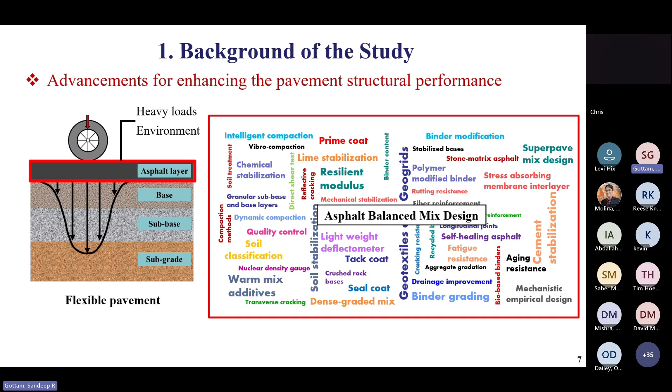More specifically, if we see the advancement, which is the asphalt balanced mix design process, this is a kind of buzzword around the globe for the past 5 to 10 years. So what this asphalt balanced mix design is, it's basically the process which aims at mimicking the rutting and cracking performance of asphalt mixes. The asphalt layer basically fails primarily in two failure conditions. Those are rutting and cracking failure. So making these mixtures resistant to rutting and cracking is called the balanced mix design process.

How do we do that in our laboratory? So basically to make a mixture resistant to rutting and cracking, we need the basic materials, as we know, the binder and aggregates. Once we have these materials, then we prepare the asphalt samples, which consists of a mixing process and compaction using a Superpave gyratory compactor. Then based on the local test specification and test procedures, we have to run rutting and cracking tests. There are numerous rutting and cracking tests that are available with the agencies.

But here in Texas, especially, we use the Hamburg wheel test and overlay test to evaluate the rutting and cracking resistance. So this mix design process is trial and error, and until the mix passes a specified rutting and cracking requirement, this process will be done in the laboratory. Once the mix meets the rutting and cracking requirement, the next step is to produce the JMF, and then next the construction of asphalt layers will go in the field.

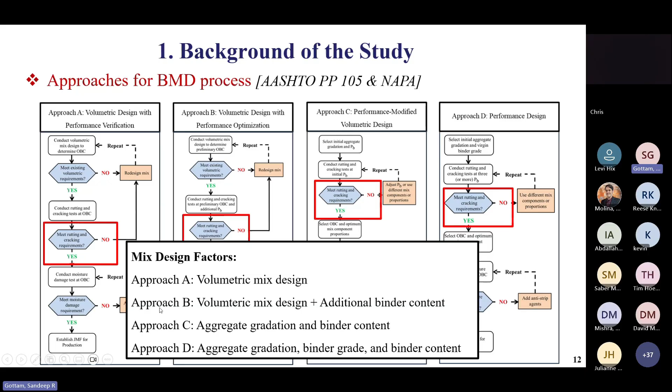Since we have a flow chart here, and I'm unable to go through all these details, instead of that, I would like to just highlight the mix design factors that control each approach. If we take approach A, that is completely dependent on the volumetric mix design, and if one would like to go with approach B, then the factors that need to be varied are the volumetric mix design plus additional binder content. In the case of approach C, it is related to aggregate gradation and binder content, and approach D considers aggregate gradation, binder grade, and binder content. So approach C and approach D completely eliminate the volumetric requirement. They are special approaches, whereas they don't consider the volumetric mix design process.

Okay, so let's start and present a little bit about skid resistance. If we look at the pavement hierarchy level, we have roughness at the top, megatexture next, macrotexture third, and microtexture fourth. So this is a kind of hierarchy level of the pavement, how it starts from roughness at high scale to microtexture at very low scale level.

The first two, roughness and megatexture, are related to comfort, and comfort is directly dependent on the distresses that are there on the pavement. So if a pavement shows rutting, cracking, or any other kind of failure, that will affect the comfort of the road user. So the comfort won't contribute to the skid resistance. The only two factors that contribute to the skid resistance are macrotexture and microtexture.

The thing that affects the macro texture is gradation of the mixture, whereas micro texture is more specifically focused on the individual aggregate texture. So how macro texture and micro texture generate the skid resistance is based on the hysteresis forces.

If you see here in the figure, the macro texture causes an opposing force on the tire. That force on the tire generates skid resistance, and the micro texture generates adhesion forces. This is due to the tire and the individual aggregate particle interaction. So both these hysteresis forces and adhesion forces generate the skid resistance at the interface of tire and pavement surface.

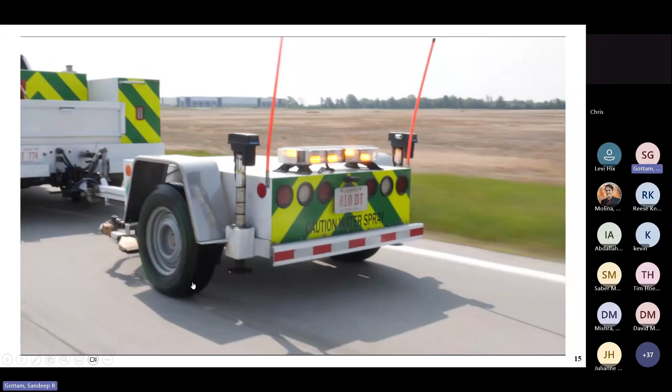It's all safe. I think this is kind of a skid test that we do in the field to evaluate the pavement skid resistance. So the question might be, how do we evaluate in the lab? To evaluate mixture frictional resistance in the lab, we have a procedure that we follow. Before explaining this slide, when it comes to the field, I will say skid resistance as a name, and when it comes to the lab, I'll say mixture frictional resistance. So skid and friction are the two names used technically in this field of pavement engineering.

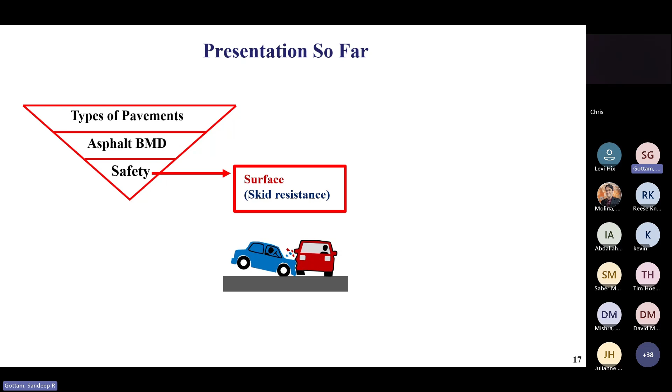Then, more specifically on the flexible pavement side, I talked about the asphalt BMD process and its importance for structural performance. Then, on the safety aspects of flexible pavement, I talked about the surface factor that affects road user safety, which is based on skid resistance. Okay, so let me move on to the significance of the study.

As we have shown in the title of this workshop, we are trying to incorporate skid resistance into the circle, more specifically during the asphalt mix design stage. So far, any agency or any contractor does a mix design process. At that point, they target rutting, cracking, and moisture damage performance. If the mix meets the rutting, cracking, and moisture damage requirements, then it goes to field construction.

But one thing that was not given much emphasis during this mix design process is skid resistance, which is especially important for the safety of road users. So we are trying to add skid resistance as a part of this full circle. When we consider this end goal, we found a few gaps in the literature, which are the factors stopping us from incorporating skid resistance into this circle. The first factor is that if we have a poor frictional resistant mixture, we don't know how to improve the mixture frictional performance.

The other thing is, as I presented, the test method that we use in our laboratory takes almost 50 hours. So agencies or contractors may not be able to use those kinds of test procedures, so we need a surrogate test method instead of the lengthy procedure that we have as per the AASHTO PP 104 specification.

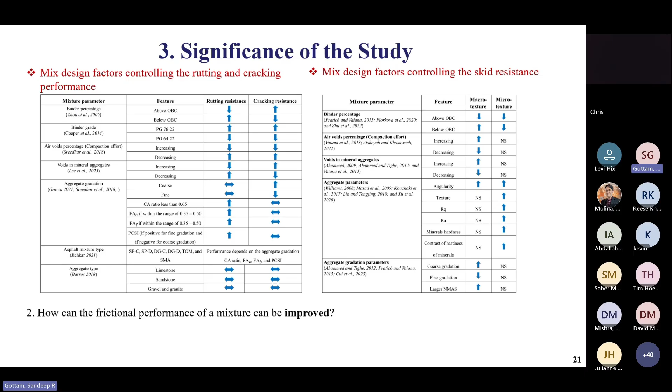But on the other side, to improve the mixture skid resistance, more specifically to improve the macrotexture and microtexture, there are factors that we found through the literature study, but most of the factors were not studied, as I highlighted here in the cells as NS. So there is a gap in the literature to understand how to improve the mixture skid resistance using the mix design factors.

Then at third, as I mentioned, this process that we follow in our laboratory takes 50 hours. So this is not a practical or feasible method for highway agencies or contractors. Not only the time, the other factors are the manpower and the initial cost and operational cost of these devices to evaluate the mixture frictional performance. So there is a need to come up with a practical or surrogate test method instead of the process that we currently use in our laboratory.

Then at fourth, as I mentioned earlier, we have frameworks to improve the mixture rutting and cracking performance, but we don't have a framework to improve the mixture skid resistance. So if we have a combined framework that considers rutting, cracking, moisture damage and skid resistance, and we use that kind of framework during the mixture design stage, it will definitely help to make the mixture resistant for all those four performances, and that mixture will definitely perform better in the field when it is constructed and open to the traffic. So to address all these four gaps, we came up with a research methodology.

Since our first gap is to improve the frictional performance, in our research methodology we tried to vary each mixture parameter and see what is controlling the mixture frictional performance. Once we did that study, we performed some case studies in our laboratory and field friction studies. The case studies and field friction studies are a validation and verification of the parameters that we identified in our stage 1.

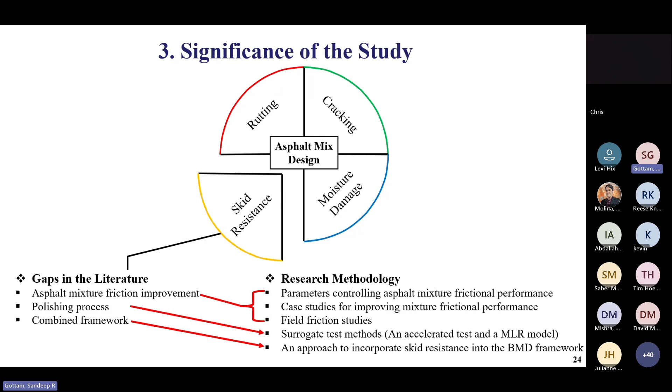Okay, let me start with the results part of the study. Before beginning with the results, I would like to give a glimpse about the materials and test methods that we followed. If I show the materials that we used, we used 3 grades of binders in our study, and we used 8 types of aggregates, which include limestone, gravel, dolomite, granite, rhyolite, sandstone, trap rock, and pyrite aggregates.

And we used 7 types of asphalt mixtures. Those are Superpave coarse, Superpave dense, dense graded coarse, dense graded dense, thin overlay mixtures coarse, thin overlay mixtures fine, and stone mastic asphalt. And then coming to the test methods, we have a video demonstration on how to evaluate the mixture laboratory frictional performance. This video demonstration is prepared by our PhD student Mirza Amiskan.

Now I'm going to stop here with my presentation and play that video. It's about a 14-minute video, and that video demonstration will give a visual experience on how to prepare an asphalt ring, how to polish, and how to do the friction test in the laboratory. So I'm going to play the video that we have as part of this video demonstration.

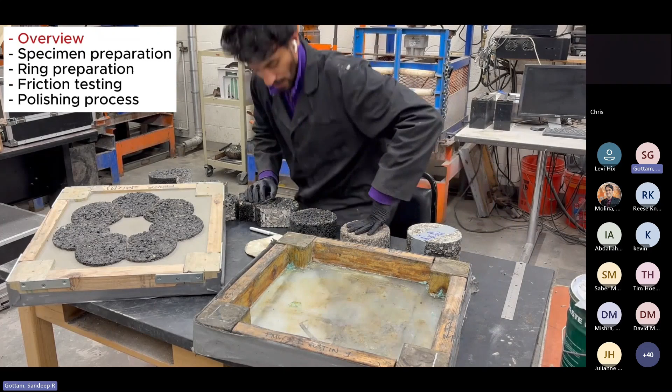So you can see that the sides are straight, right? And when we put them on the mold, it should be exactly like this, see, like touching each other. So that's the thing. This is an empty mold here, just to show how we do it. So I will place the samples here. Just have to put it, and we can see the height is the same. We can also use the scale just to make sure. But since I have been doing it for a long time, I'm just used to it.

We usually make 8 samples so that there is always an extra one if some of the samples is not good or it's crooked or something like that, just to be on the safe side. That's how we just place the samples in the mold. And you can see that the samples are good. We just rearrange it. We have to make sure that

all the samples are in the middle of the mold, because the DFT will be here, and if it's in the center, it will be good. The results won't be affected. Also, we put the mold under the 3-wheel polishing device, so the polish path is on the right one.

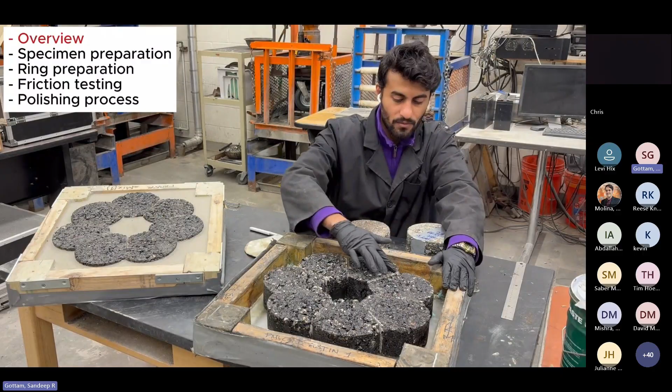So what I usually do is, after placing the samples like this, I usually run a finger like this, so that we can make sure that none of the samples is higher. There is no difference in the heights of the samples. So yeah, this is good, right?

And what about this field work? So once we have cut it, once the base is a flat surface, what we usually do is we sometimes put the sand in this mold, and then we put the samples on the sand, especially the samples that are lower than 62, and then we hit the samples a little bit with the rubber hammer, so that the sand is compacted. After that, we pour the cement on the mold. So that's how we do the samples that are lower than 62.

You have to make sure that the height of the samples is up to 62 millimeters, same as the mold itself. So that's how we do it. And then once you have done this, you just have to pour the cement in this mold, here in the middle and also on the sides, and make sure that the level of the cement is as high as possible. As we have already marked the sample, the next part is the cutting part.

So we have to make sure that there is no smaller aggregate or something on the cutting machine, because it will affect the cut. It has to be lying straight on the cutting machine. You have to be very careful about that. Even a little aggregate or a smaller aggregate can affect the cut. It will get crooked.

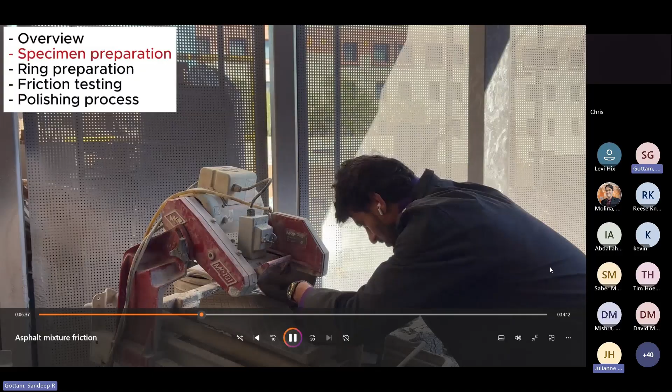So once you are done, we place the sample on the cutting machine. We put it as close as possible to the cutter, and by using a scale, we align the line and the cutter so that it's straight. So once we are done, it's straight. We make sure that it's not moving, and then we just start very slowly.

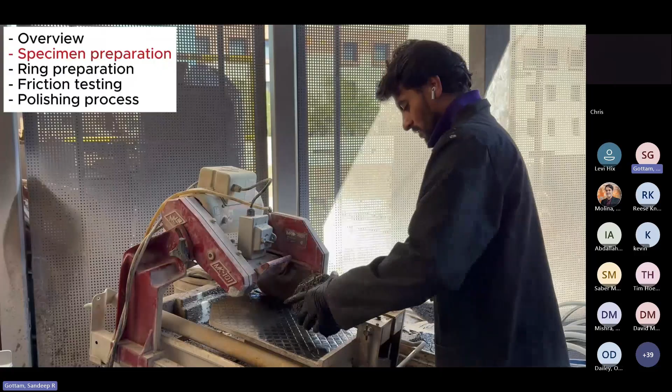And then we just turn it off, and then we remove the sample, and again we have to clean it because there are little particles in the cutting machine. We have to clean it very thoroughly, and then we can put it again like this, and then see, like now see, it's moving. So that's the reason there was something below the sample, and if you put it, it is moving, see, like this. So that's why it's very important to clean the cutting machine.

It should not move. Still. Now it's not moving, so now it's good. Again, we have to align it with the cutting machine. We don't have to press it against the blade, we just have to place it. Otherwise, it will affect the alignment. Now it's exactly at the line that we marked.

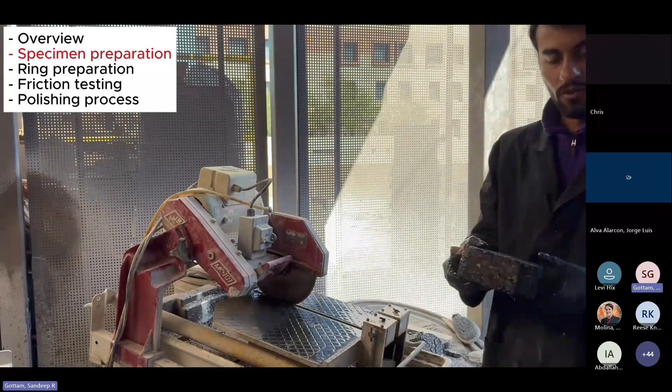That's how we can cut the sample. Now, as we can see, it's not crooked, it's straight, exactly straight, as we can see. Right. So now, once we have arranged all the samples, the next part is we have to pour the cement. That's how we do it. We pour it slowly.

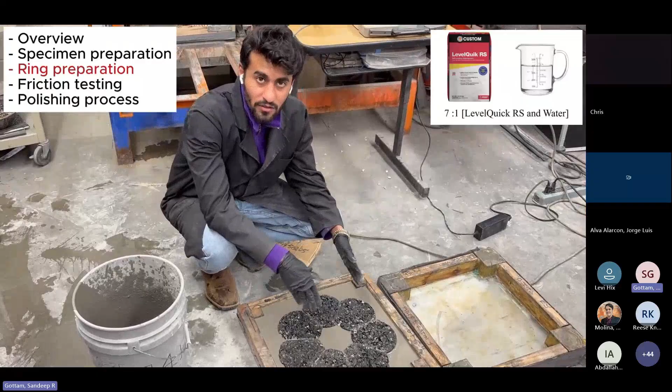Now it looks perfectly fine. The height is good, the cement level is good, everything is good, and now it's good to test. Like, we will leave it overnight, and when we come tomorrow, it will be dry and ready to be

tested. Alright, so here is the dynamic friction tester that we use to test the friction of the asphalt mixes. We also use it for the friction of aggregate rates that we make. So I will tell you about the steps of this. So this machine has 3 pads here. So when you run it, it goes up to a speed of 80 km/h, and then after that, this plate, it falls on the specimen.

So while it's going to that speed, the water, it starts throwing water from these holes on the sample, and then after that, like when it falls on the specimen, it measures the friction of that specimen. So we usually run up to 200 tests. After that, we change these pads because these pads, like, they have a life, so the friction results start to decrease. So that's why we have to change these pads after every 200 tests. So that's how we run it.

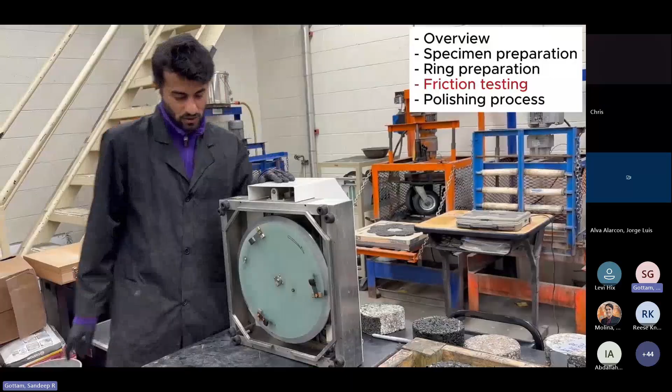We usually, when we are transporting the machine or moving the machine, we have to put it like this, and before the test, we just have to remove it and then run the test. So that's all about this machine, and now we will run the test and then we will see how it works. For the DFT, we have two outlets here. One is the USB and the other one is the power outlet. Usually we use a battery for this power outlet, and this lead connects to the laptop so that the data can be run. So the first step is that we move the DFT.

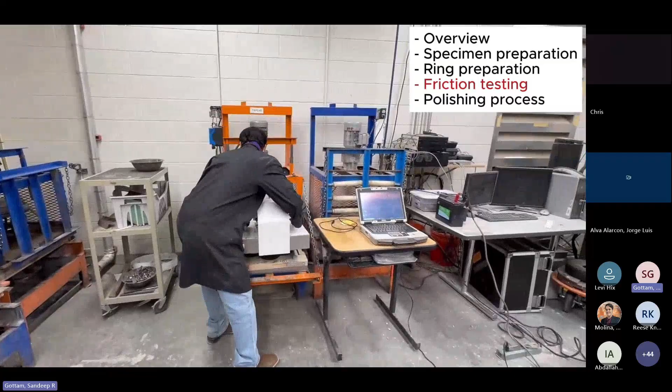Since it's the first time we are running this sample, we have to make sure that it's going to be done. Yeah, like that. Once we have placed the sample, what we do is we mark the location where we are placing the DFT so that the next time we run the test, it's not at a different location. So that's why we always mark the location where we are placing the DFT. Once we are done with that, as I discussed about the cables and this knob, we remove this knob and then we just connect the cables.

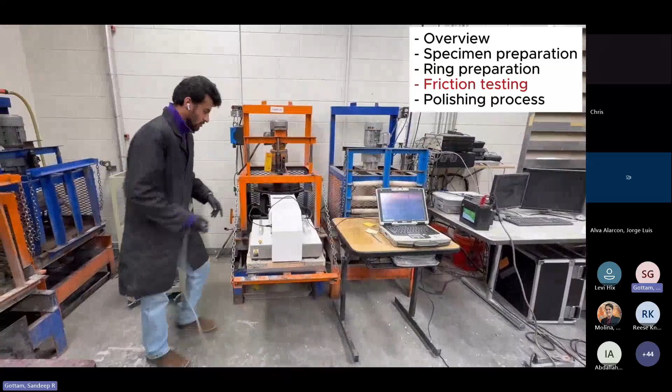The first cable for data is connected to the DFT and the power outlet. Then we have this one. So once we are done with the power outlet, the next step is that we have to connect the hose to the DFT. It's connected with the tank, so it supplies the water to the DFT, and it has to pour the water on the sample. When it runs, it will start pouring the water. That's how it gets the water supply.

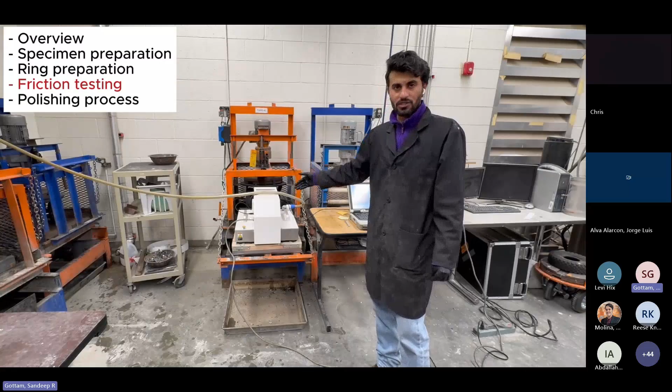Now the DFT is running, and it will reach up to 80 kilometers, and then a plate that's rotating below it will fall on the sample, and that's how it will measure the friction of the sample. And the water usually starts coming out of the DFT when it reaches the speed of 60 km per hour. That's how the test started, and as you can see, when the plate falls on the sample, it is rotating and it stops due to the friction of the sample.

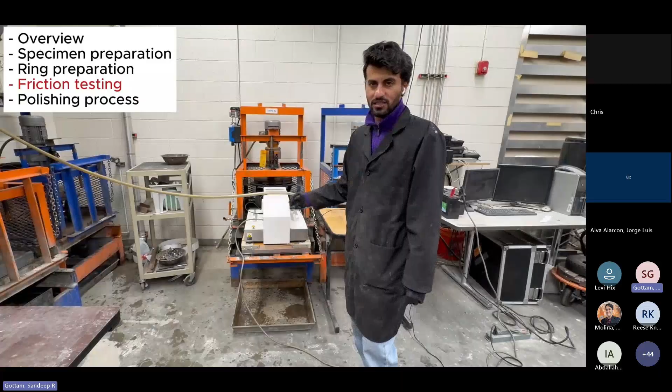So as I mentioned, we usually run 3 tests. So this was the first test. We usually wait just 30 seconds or up to 1 minute before we test another track. So now we will run another track, the second track.

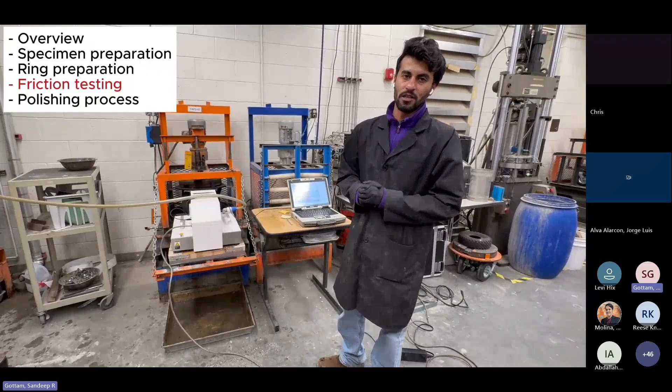And go up to the speed of 80 kilometers and then, after that we will just plot the values and take the average of the three tests at a speed of 60 km per hour. So once the test is done, what we do is just put the top back before we move it.

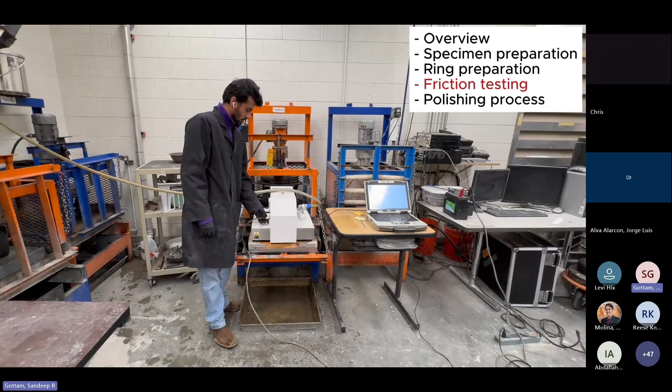Then when the machine is off, we remove the outlets, both the USB and the power outlet. Then remove the tools.

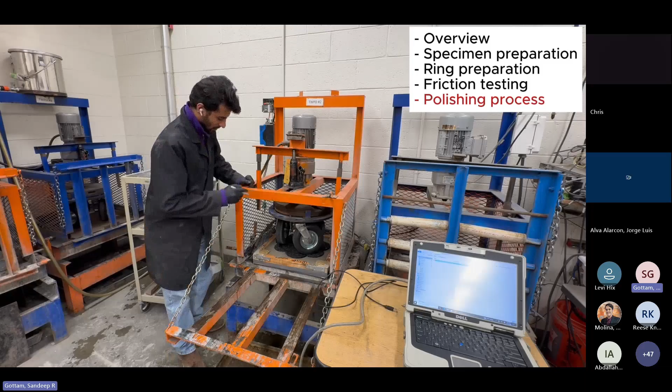Once the specimen is in, we can just start running the wheel polishing device. So I have set the cycles up to 1000 cycles. And what I usually do is I also mark it a little bit here, so that when I put the sample out of the wheel polishing device and test it for DFT, and I have to put it back, it should be exactly at the same position so that there is no variation in any of the results. So now you just have to run it, and that's how it starts polishing.

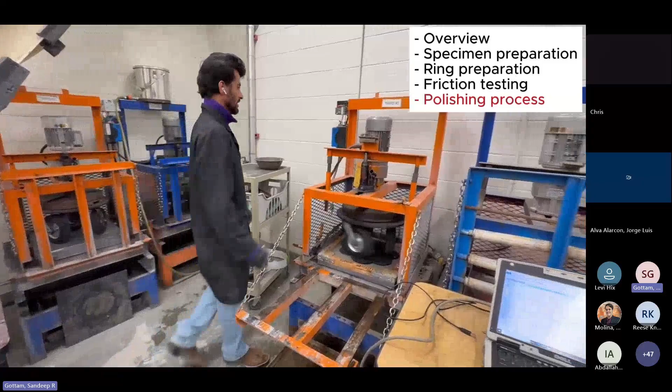As you can see, it will take up to 15 to 20 minutes for just 1000 cycles. So when you have more cycles, like 25K cycles or 50K cycles, you just run it overnight, and then you just run it the next time. All right. So as we have demonstrated in the video, this is how we prepare the asphalt ring and do the friction test and polishing process.

So I would like to show an Excel file which explains how we generate the friction deterioration curve. Okay, so as Amish mentioned in the video, we do 3 friction tests. If you see columns B, C, and D, these are the friction values for the pre-test, and in column A we get the speed. So the friction values corresponding to each speed are in B to D. We get the friction values from 80 kilometers per hour to 10 kilometers per hour, and then at 10 kilometers per hour, the DFT stops on the asphalt ring.

So in this data, the main things are the 60 kilometers per hour friction values, 40 kilometers per hour friction values, and 20 kilometers per hour friction values. The reason we consider these is because ASTM E1911 specifies to report these values as friction values of a given sample. So once we have this raw data, we do some standard deviation, averages, and coefficient of variation to see how the 3 tests vary in terms of their standard deviation and coefficient of variation. This process we do until 300K polishing cycles.

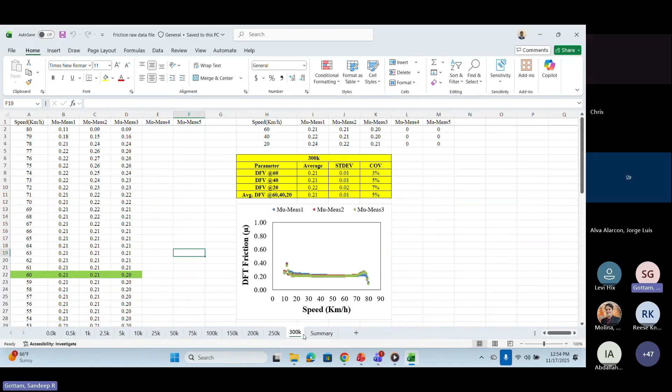As I mentioned in the presentation, we do polishing and we stop at a certain number of polishing cycles and we do the friction test again. So the sheets that you can see here at the bottom are related to polishing cycles at the corresponding cycles. Then once we are done at 300K, we generate the friction deterioration curve. I would like to show an example of how we generate it.

So basically here the B column is the cycles, that is 3 wheel polishing device cycles, and C here is wheel passes. One 3 wheel polishing device cycle equals 3 wheel passes because it has 3 tires. So we just wrote it here in terms of wheel passes. Then we got the DFT values, those are dynamic friction values at 60 kilometers per hour, 40 kilometers per hour, and 20 kilometers per hour from the corresponding polishing cycles Excel sheets. We took the average here for the 3 values.

And here we just prepared the graph that is three-wheel polishing device cycles versus DFV. Usually we use 60 kilometers per hour in our reports and presentations, because as we know crashes more specifically happen at high speed, so that's why we consider the DFT value at 60 kilometers per hour. So as we can see, this is kind of raw data.

As you can see, there is some noise, so we don't use this graph directly in our presentation or report. We do a curve fitting process to make it look smooth and clean. So for that, once we have these values, we do a power fit curve fit. The reason for the power fit is that when we looked at friction deterioration curves for almost 50 mixes, we found that power fit is a good curve fitting process for the friction deterioration curve. Then once we do the power fit, we generate the equation. So here y is nothing but the friction value.

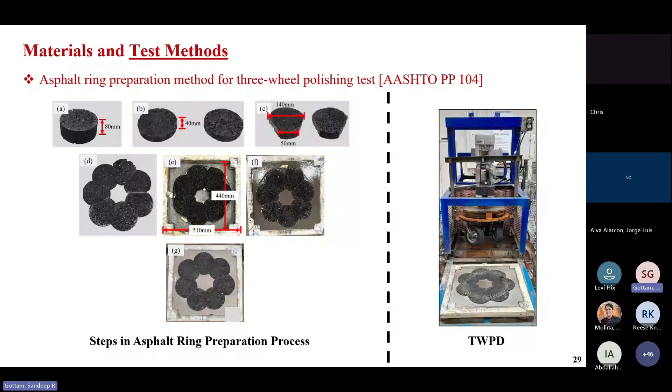Let me go back to the presentation. Okay. So as we have demonstrated in the video, this is the process that we do, the ring preparation process and the polishing device. I would like to again mention that we strictly followed the AASHTO PP 104 specifications. There are a few changes that we did for the ring preparation process and the polishing condition because of our research needs and to make the testing process easy in our laboratory.

And the friction test we did as per ASTM E1911, and we did wet friction test. As we know, the frictional performance or the skid performance is low under wet condition when compared with the dry condition, and we did friction measurement at these polishing cycles.

In addition to the frictional performance for the asphalt mixes, we also performed the rutting test as per ASTM D6925, and we did cracking test as per ASTM WK26816, and we did moisture damage test specifically to simulate the moisture damage for the asphalt mixes as per ASTM D7870, which considers the moisture-induced stress tester device for simulating the moisture damage in the asphalt mixes.

So before jumping into the results in detail, we would like to give a 10 minutes break, and after that we will continue the presentation to show how we improve the mixture's frictional performance when it is having very poor frictional resistance. So I would like to stop here and give a 10 minutes break, and after that we will continue.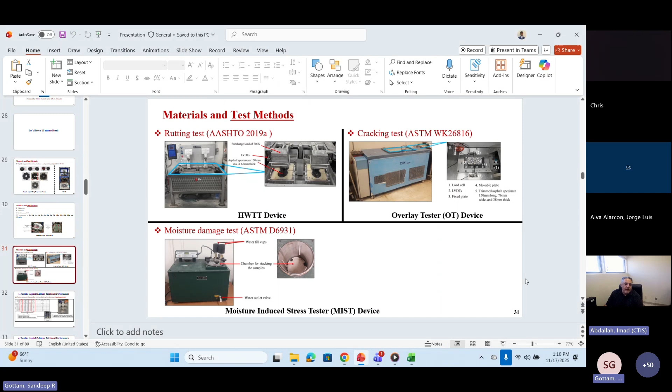Hey, we're back. I just wanted to thank everybody for being part of this presentation. Before we continue, I just wanted to thank Sandeep. We talked a little bit about mix design, and he went into a lot of detail on how we carry out this test and showed a video of how we prepare our samples.

By the way, there are several ways of preparing. You can prepare a slab and cores. We chose to go preparing samples using cores, and I think our DOT is following along with that. It allows us to do cores from the field or prepare samples in the lab with the same setup.

So the next part that Sandeep will present is going to focus on a controlled experiment. Now that we have a test that can measure the terminal friction value, and that's where we started. The interest was to look at the terminal friction value of the mix. What are the parameters that can affect that? What parameters are going to affect that terminal friction value in terms of the mix design, the binder, the air voids, and so forth? So he and his colleagues put together a really good controlled experiment, and he's going to go over that with you guys.

And then later we will talk a little bit about the aggregate. And then the final part of the presentation would be how we progressed to come up with a method that will speed up this testing. He mentioned that this test is over 40 hours long, so it is time consuming. For a DOT, they would rather have something a little bit faster, and we'll discuss some of those studies that we have come up with. So Sandeep, I'll turn it back to you.

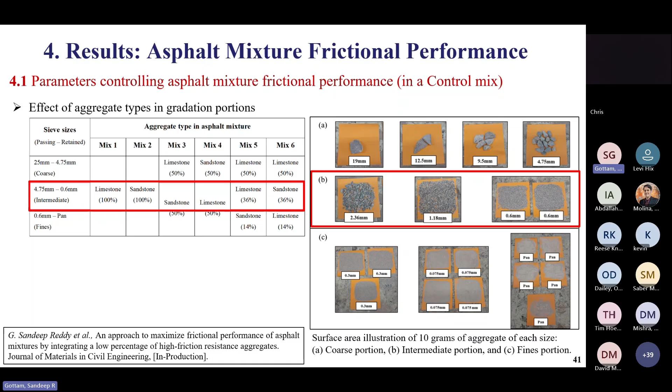And then we tried to do some case studies on the typical mix design. As I said in the previous slide, we considered the control mix. Then we went back to the typical mix, which has different bins and different aggregate types. We did 3 case studies. Our goal of these case studies was to verify and do some kind of research validation based on our control study findings. In these case studies, we targeted the intermediate portion of the gradation and replaced it with some good frictional resistant aggregate.

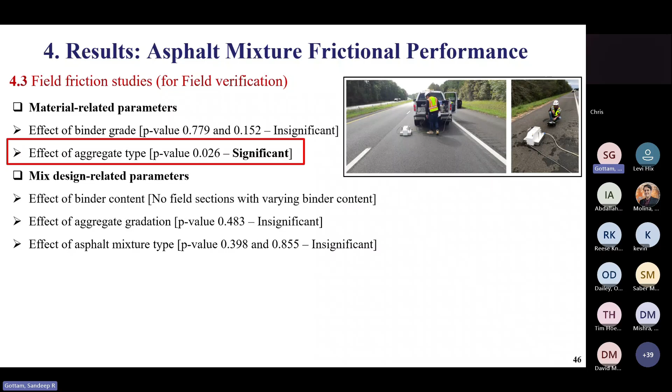Then in the next section, we have 4.4. Here we tried to come up with a surrogate test method. So far in the results until 4.3, we have seen how we can improve a mixture's frictional performance during the mix design stage, and that is by targeting the intermediate portion of the aggregate gradation. The next step is to come up with a practical test method as a surrogate to the test process that we currently have, per PP 104 method, which takes 50 hours.

So what we did was analyze the friction deterioration curve for asphalt mixtures, and what we found from our study was that after 25K polishing cycles, the friction deterioration curves become linear. So we did a power fit for the friction data that we collected up to 25K cycles. Using that power fit function, we predict the terminal friction value of that asphalt mixture. This process takes 16 hours, and we don't need to polish and do any friction test

between 25K and 150K. We stopped at 150K because our study showed that the 150K terminal friction value and the 300K friction values are almost the same. There is not much difference. Though PP 104 specifies stopping at 110K polishing cycles, we were doing up to 150K, and in the previous sections, as I showed, we went up to 300K even. But after seeing the large data set, we found that 150K is enough. In this accelerated test method, we just collect the friction data up to 25K, and we use these points to predict the terminal friction value.

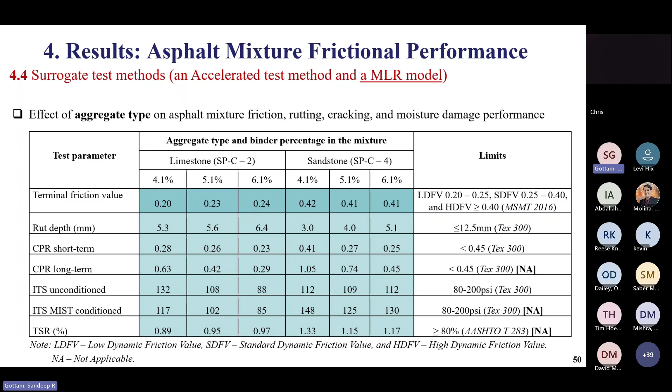We consider two mixes with the same gradation, where one mixture has limestone and the other mixture has sandstone. So we try to see the effect of aggregate type on the performances. We varied the binder percentage, that is 4.1, 5.1 and 6.1, and did the same for the sandstone mixture. As you can see, the effect of aggregate type is significant on the terminal friction value, whereas the effect of aggregate type on other mixture performances is minimal, as I highlighted in light color in this. So the effect of aggregate type is significant on friction value, whereas its effect on other performance is minimal.

Then we try to formulate an MLR model, and as we have seen from our extensive study that we did by varying the aggregate gradation and aggregate type, the gradation has minimal effect, whereas aggregate type has significant effect. So we came up with the Weibull fit alpha and beta parameters. This considers the gradation effects in the regression equation. And then for the aggregate type effect, as we have seen in our control study, surface area affects the mixture frictional performance, and in particular the aggregate that is retained up to 0.6 mm controls the mixture frictional performance.

We considered surface areas of these gradations. We came up with the surface area factor for each sieve size, and we multiplied it with the aggregate friction value corresponding to each aggregate size. So then we came up with the combined aggregate friction value as a parameter from the aggregate side. We use CAFV, alpha and beta, and we came up with the MLR equation. And this MLR equation predicts the asphalt mixture terminal friction value at 150K polishing cycles.

The major significance of this MLR method is that we don't need to prepare asphalt samples, we don't need to polish, we don't need to do any friction test. If we have a gradation, if we just add the alpha and beta parameters of the Weibull fit of the gradation into this MLR equation, along with the combined aggregate friction value, then we can predict the asphalt mixture terminal friction value.

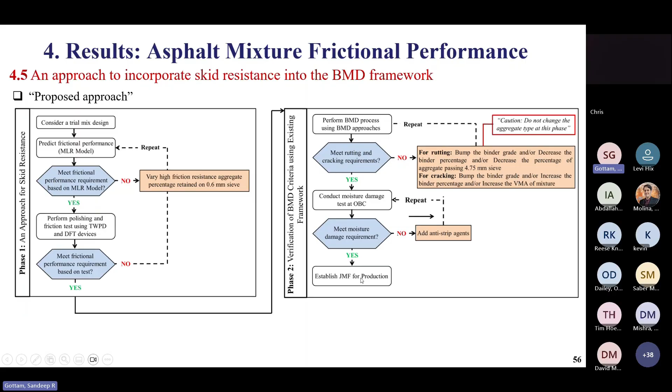And some of you might have questions about whether the addition of these anti-stripping agents will affect the frictional performance or not. As far as my knowledge goes, I would say these won't affect the mixture frictional performance, because the anti-stripping agents are very fine particles and they will go inside the asphalt mixture, not much onto the surface. So they may not affect the mixture frictional performance much. So if it meets the moisture damage requirement, then it goes next to the JMF production and field pavement construction.

Okay, so to fit skid resistance into this circle during the mix design stage, we found some gaps, and we went through the research methodology and have results to address those research gaps. So using these results, agencies can try to incorporate skid into this full circle during the mix design stage. To improve the mixture frictional performance, one has to target the intermediate portion. In order to have a quick test method, the power fit method can be used, or the MLR model that we formulated, which needs aggregate gradation and aggregate friction values as independent variables.

And we also proposed a combined framework that can be used during the mix design stage to make the mixture resistant for friction, rutting, cracking, and moisture damage performance. So in this entire thing, the one thing that we are left with is aggregate friction value. In the next slides onwards, I'm going to present how we evaluate the aggregate frictional resistance in the lab. If we have the aggregate friction value, then we can use that in the MLR equation to predict the asphalt mixture terminal friction value at 150K polishing cycles.

So now I'm going to talk about the friction tests, which are alternative aggregate friction tests. The first thing in this section is the conventional test method. We already have a specification, AASHTO PP103, to evaluate the aggregate frictional performance. As per this test method, if we have washed and dried aggregates, we have to prepare the aggregate rings, which consists of placing the aggregates inside the mold and pouring a binding material. After that, we'll get this aggregate ring.

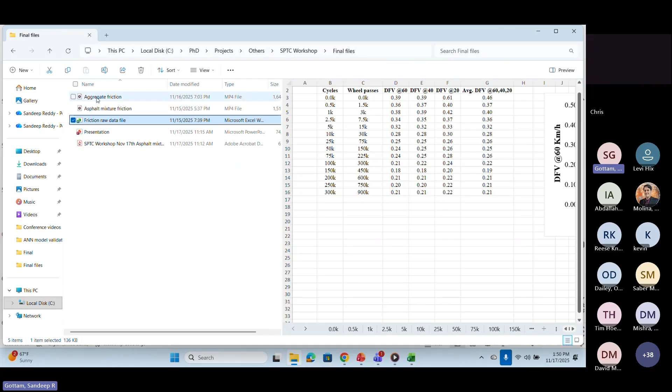Good afternoon, everyone. My name is Omole Boyega, and I'm currently a PhD student at the University of Texas at El Paso, and I'm currently working on the TxDOT funded project titled Frictional Characterization of Texas Aggregates. In the course of this project, I'll be testing about 110 aggregates in Texas. I'll be testing for their friction values.

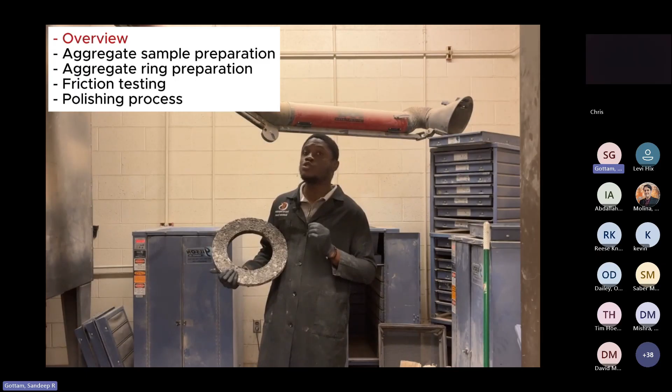So in this presentation today, I'll be giving an extensive overview on how these aggregate rings are being made and how the three-wheel polishing device is being run on these aggregate rings. I'll be showing how the aggregates are being sorted, prepared, washed, how the ring is being made, and also how the three-wheel polishing device is being run on this aggregate. In this project, we strictly follow the AASHTO PP103 standards, but we made a little adjustment just to suit our research purposes. And there's a justification for every adjustment that was made.

So I'll be shaking these aggregates for 5 minutes. After 5 minutes, I'll take out the aggregates retained on the 9.5 mm opening or 3/8 inch sieve. The whole idea behind this is to make sure we have as much as 7 pounds, which is equivalent to 3.5 kilograms, retained on the 9.5 mm opening sieve. Because for us to be able to make one ring, we need at least 3.5 kilograms of the aggregates.

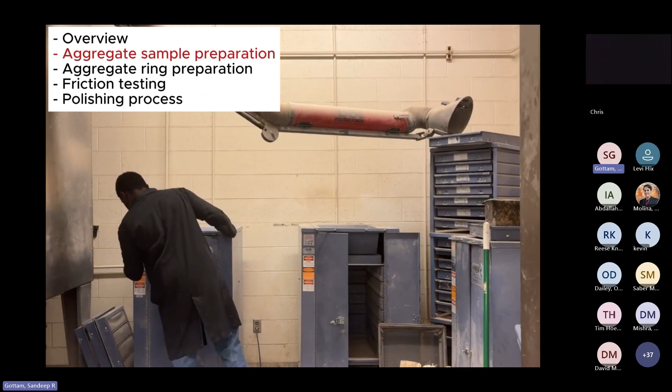This is the amount of aggregates we got retained in the 3/8-inch sieve. And like I said earlier, we need at least 7 pounds, which is approximately 3.5 kilograms of aggregates to make one ring. From each aggregate source, or each different aggregate, we make 2 rings, then we average the values of the friction for our friction value.

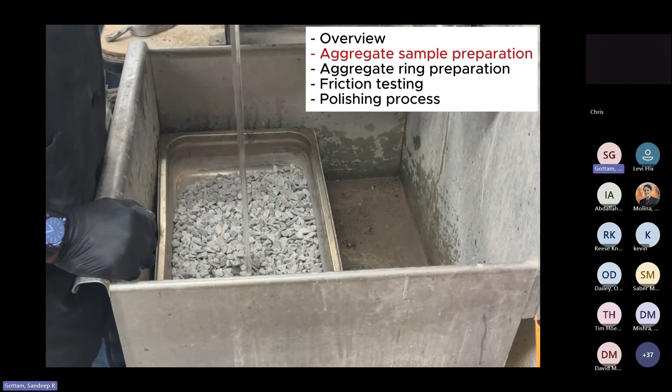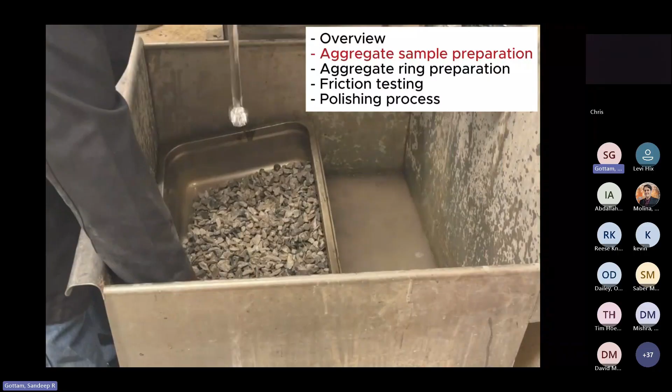Next step is to wash the aggregates. The main reason why we wash the aggregates is to remove dust, clays, and fine particles. So I'll be washing the aggregates now. Right now, the water from the aggregates looks colored and dirty. So I keep rinsing these aggregates till the water becomes clear. That's when I know when to stop. So the water is clear now, and the washing of our aggregates is done.

After washing our aggregates, the next step is to dry our aggregates in the oven. According to AASHTO PP103 specifications, the aggregates are to be dried between 230 degrees Fahrenheit and 240 degrees Fahrenheit. In Celsius, this is about 110 degrees Celsius to 115 degrees Celsius. So I'll be drying the aggregate in the oven till the weight becomes constant and the moisture is fully evaporated.

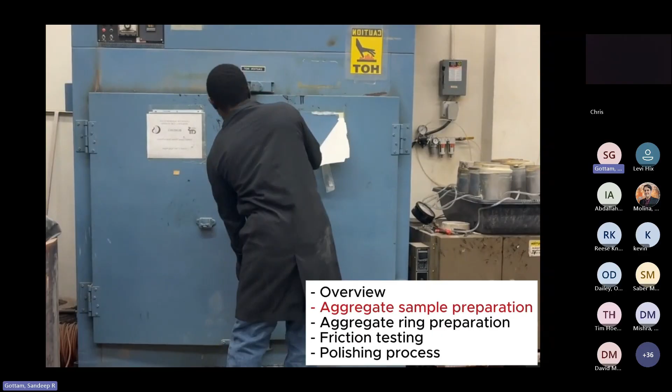This is the process of ring making. And the first thing we do in this process of ring making is the mold preparation. So I'll be walking you through how we prepare our mold and how we make the rings with the molds.

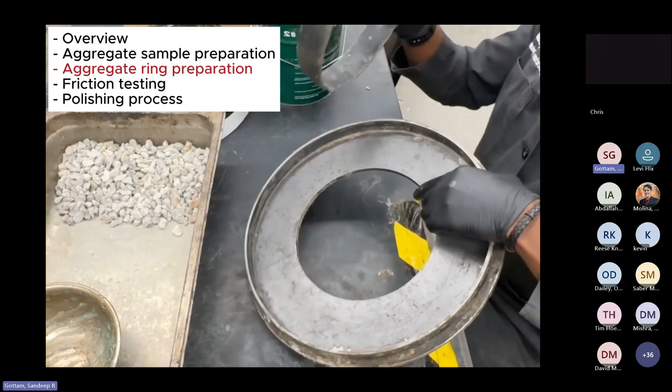Our mold is divided into 2 parts. We have the smaller part of the mold, which is this. What this does is to just prevent our Portland cement from slipping out of the mold when we pour it inside the mold. Then we have the larger part of the mold. This is where the Portland cement and the aggregate sits on.

So the first thing we do is to grease our carbon paper, which is this. And the main reason for greasing this is to allow our ring to demold easily by the time we are done making the ring. That's the main reason we grease this carbon paper, so we don't allow the cement to stick to the mold, which causes difficulty in demolding. So we grease our paper thoroughly before preparing the ring.

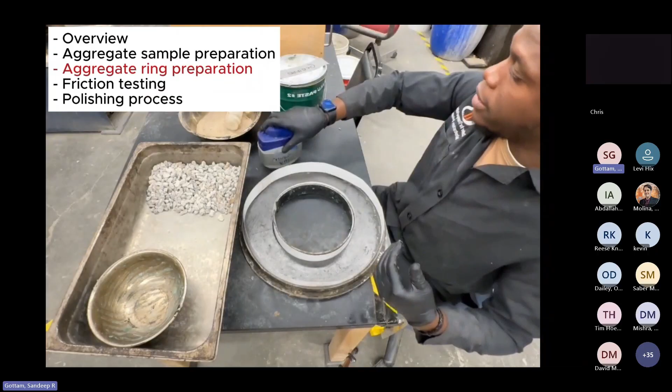So we use our grease and petroleum jelly mixed together. This is the grease and petroleum jelly mixed together.

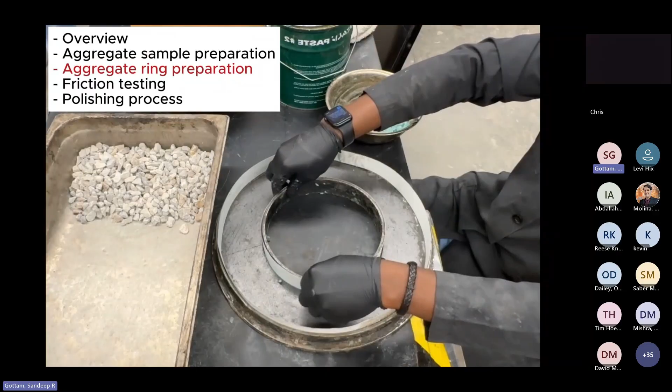After doing this, before we proceed, the first thing we have to do is to change our gloves. We are changing our gloves so the grease doesn't come in contact with the aggregate, and also the grease doesn't come in contact with the surface of the mold. Because if the grease comes in contact with the surface of the mold or comes in contact with the aggregate, there's a high chance this will affect our friction value at 0K, 50K, and 100K. So we try our best possible in the lab to reduce anything that can affect or alter our friction value. So after greasing the hard paper, we replace or change our gloves.

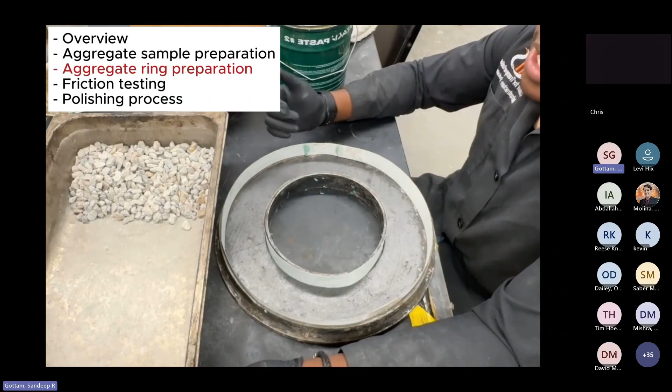After this is done, the next step is to arrange our aggregates inside the mold. And there is a specific way this is done. We don't just randomly dip our hands inside the aggregate and start arranging them in the mold. So there's something we call good aggregates and bad aggregates. I consider this as a bad aggregate, and I consider this as a good aggregate.

The reason for this is this aggregate has an angle which allows it to bond properly with the cement, but this aggregate is flat. It has no angular shape, and there is no proper bonding or interaction with the cement. So if we use this along where the wheel path of the three-wheel polishing device goes through, while the three-wheel polishing device is running on the rings, there's a high chance that this aggregate is going to come off, while this aggregate doesn't come off. So we have to carefully select our aggregates and arrange them along the wheel path where the three-wheel polishing device is going to go through.

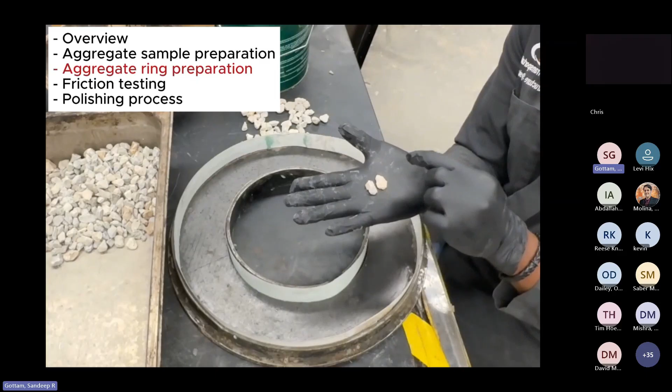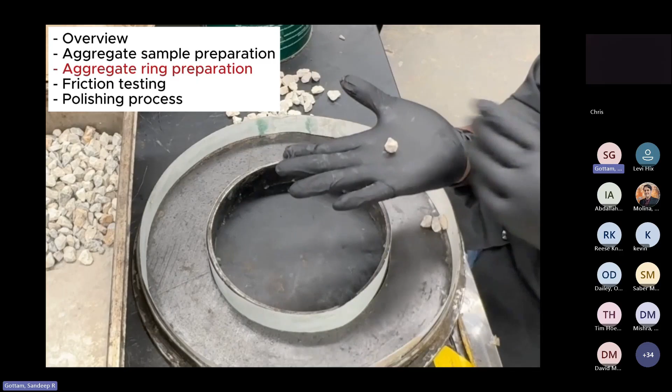So this aggregate that I consider as the bad aggregate can be arranged on the wall of the mold. This is the bad aggregate. It can be arranged on the wall of the mold like this. While this aggregate with good angularity will be placed along the wheel path. So this, it has a good angularity. This also has a good angularity. The aggregate has been fully arranged inside the mold.

After arranging the aggregate inside the mold, we have to fill in the little voids that the aggregate cannot fill. We have to fill in those voids with mortar sand. And this has to be carefully done. It has to be carefully done because if this is the aggregate, the mortar sand cannot fully cover the aggregates. It has to go halfway and not fully cover the aggregate, because if it fully covers the aggregate, there will be no proper bonding between the aggregates and the cement.

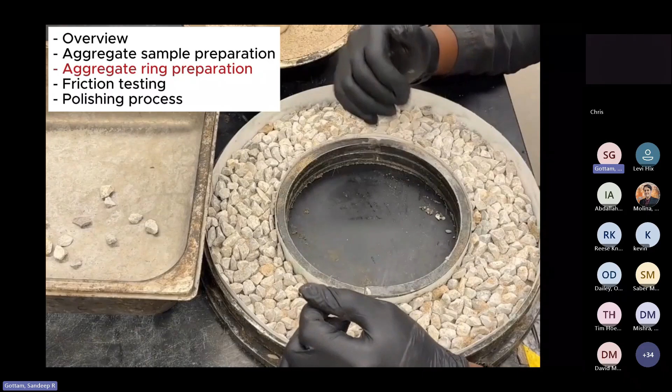Once this has been completed, the next step is to mix the cement and water together. After that, we pour it inside the mold. The amount of cement that will be used is 2,400 grams, and the amount of water that will be used is between 220 grams to 240 grams, depending on how workable our cement mix is.

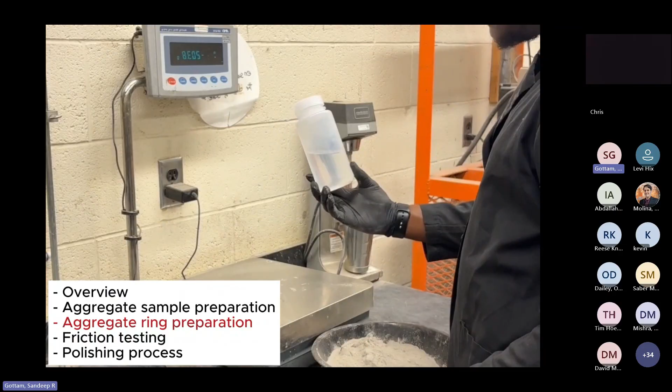I'll be measuring out 2,400 grams of cement. And this is 220 grams of water, in the cement.

Now that this has been mixed properly, the cement and the water, the next thing to do now is to pour this inside our mold with already arranged aggregates. Now we pour the cement and water mix inside the mold. So we just pour it around to ensure even distribution.

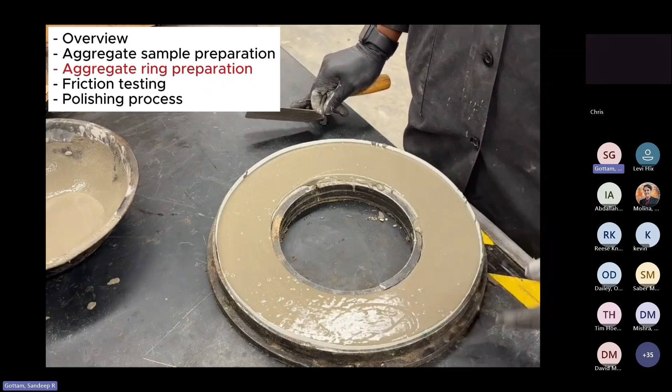So after this, we leave the cement to set for about 6 hours. After 6 hours, we demold our ring. This is what our ring looks like after demolding.

So once we are done demolding our ring, we place our ring inside the sample holder. This is the sample holder. It's part of the three-wheel polishing device. So we place our ring inside the sample holder.

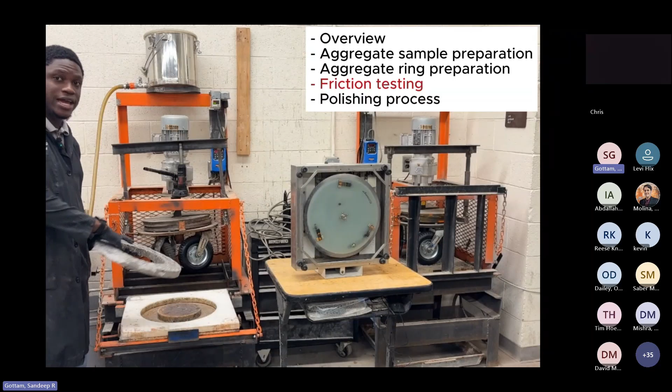Right now, I'm going to give a brief description of the DFT machine, the dynamic friction tester. This is the machine that we use to test and measure our friction values. The DFT has a rotating disc and 3 rubber sliders. The DFT measures the coefficient of friction between the rubber sliders and the contact surface. And the rubber sliders are just a simulation of the tire to road pavement interaction.

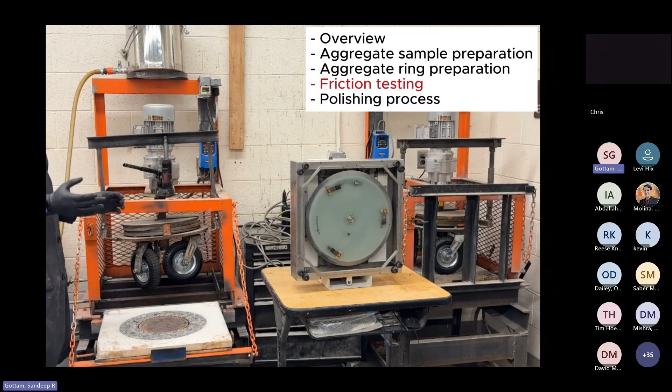And I'll also be giving a brief overview of the three-wheel polishing device. The three-wheel polishing device was built according to the AASHTO PP103 standards. And this three-wheel polishing device exerts a total force of usually between 146 pounds to 151 pounds on the sample. For the DFT, we follow the specifications of ASTM E1911.

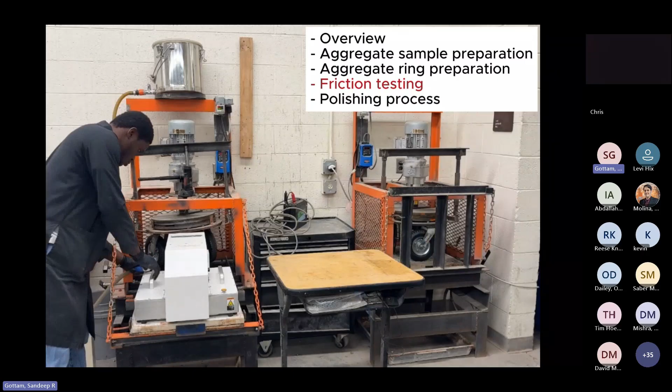So we place our DFT on the sample holder. And then we connect our water hose to the DFT because the DFT usually runs under wet condition. Then I connect the DFT to the power supply. Then also I connect the DFT to the power cable. So we have a software that we use to run the DFT. So I'm going to start running the DFT now.

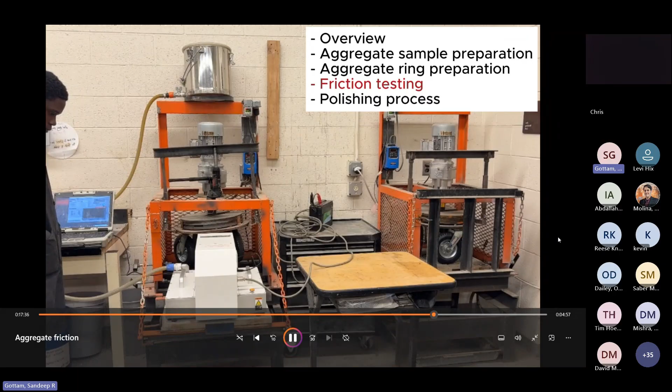So the loud noise you heard was when it got to 80 kilometers per hour, the rotating disc exerted on the aggregate surface and it made that loud noise. Then it decelerated back to 0 kilometers per hour. So usually here in CTIS, we run this test 3 times, then we average it to get our final friction value. So I'll be running it 3 times.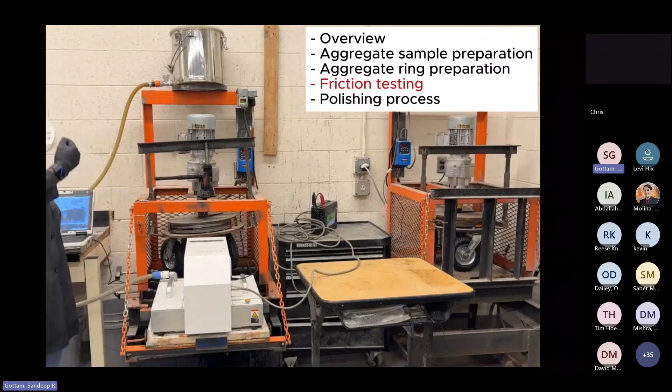The second test has been completed. Now I'll be running the third and the last test. The third test has been completed. After that, we disconnect our hose from the DFT and we disconnect all the cables and get the DFT machine aside.

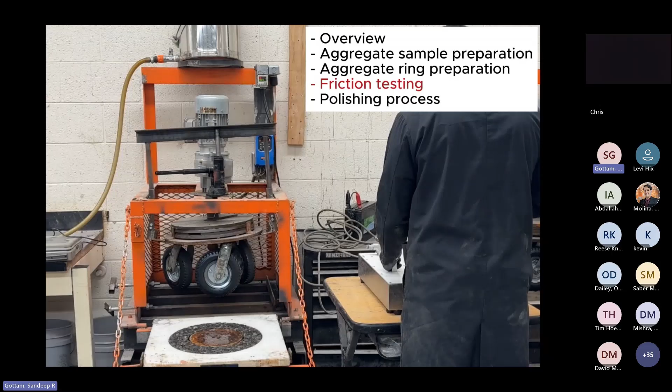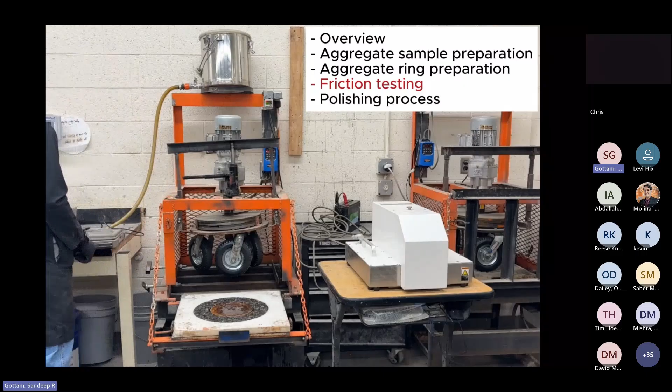The next thing I'll be doing right now is to dry the surface of our aggregate ring. And the main reason why we do this after running the DFT on the aggregate ring is to maintain consistency and control our polishing conditions. That's why we always dry the aggregate ring after running the DFT. Oh, and one other thing is also to avoid slurry inconsistency. So we do that right after running the DFT on the aggregate ring. And what we use for this is a hair dryer to dry our aggregate ring after running the DFT on it.

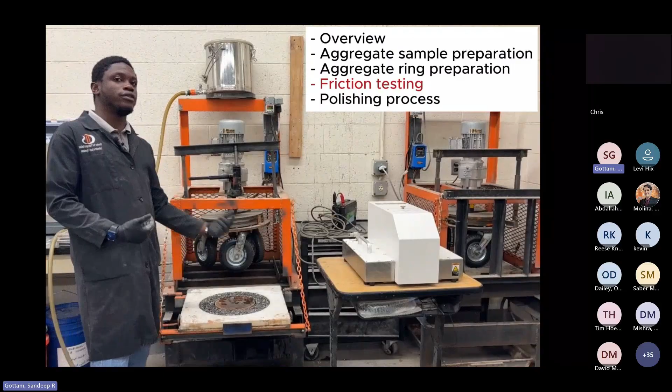Once we are done with this, we'll slide our sample holder back into the three-wheel polishing device and run the three-wheel polishing device for either 50K or 100K, depending on what we are doing. So after that, we run it for another 50K.

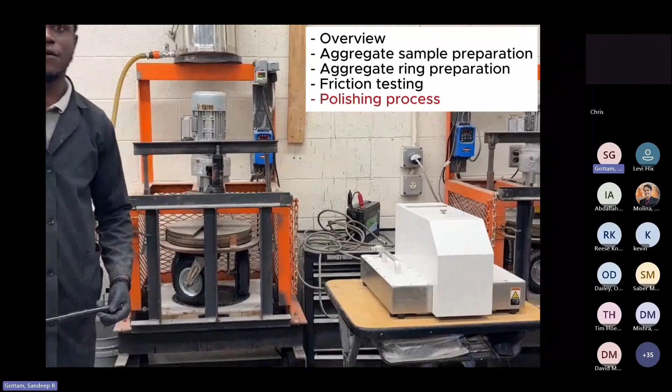I hope I've been able to give a very good walkthrough on how we make our rings, how we prepare our rings, how we sort out our aggregates, and how we run the rings in the three-wheel polishing device, and also how we run the DFT on the rings. If you have any questions, please feel free to ask during the course of this workshop. Thank you, everyone.

All right, so that is about the way that we prepare aggregate and we do polishing and friction test. Since we are running late, I would like to continue without the break. So as part of the results section, we tried to develop some alternative aggregate friction tests. As I have presented before, the conventional test method as per AASHTO PP103 takes about 43 hours and it needs a polishing device and a friction device.

So to accelerate the test process, what we did was we looked at where the gaps in this process were and where the opportunities to accelerate it were. What we first found was the sample preparation as per AASHTO PP103. As per this method, the curing time is about 12 hours. Then to accelerate the sample preparation process, we tried to use quick setting cement and water as an alternative method for the sample preparation. And the time this method takes is just 5 hours. So instead of 12 hours curing time, using quick setting cement and water, we can just wait for 5 hours for curing the aggregate ring.

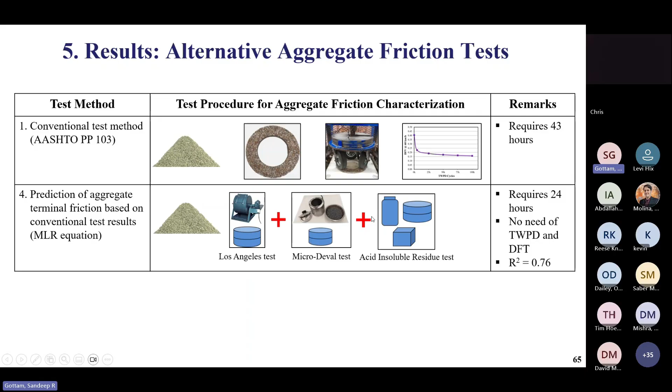This is how we do the powder X-ray diffraction test. Once we have the aggregates, we powder them, place the powdered sample in a mold, and do the X-ray diffraction test. This test takes just 0.5 hours, and again we don't need the three-wheel polishing device and DFT device. Then at sixth, which is an interesting test method, we try to use a portable X-ray fluorescence analyzer.

As per this test method, we placed aggregates on the PXRF device and captured the elemental composition, and then we used the elemental composition of the aggregates to formulate an ANN model. In this ANN model, we predict the aggregate terminal friction value, which is the output value of the ANN architecture. This method takes 0.5 hours, and again, we don't need the three-wheel polishing device and DFT device.

Among all the alternative test methods, this method gave a good R squared value of 0.94. And the other thing is this is a portable device. We can also take it to the quarry in order to test the aggregate friction value. Right now, we are in the process of doing some more tests using the PXRF device, and I'm going to elaborate more on the PXRF because our DOT likes this test method.

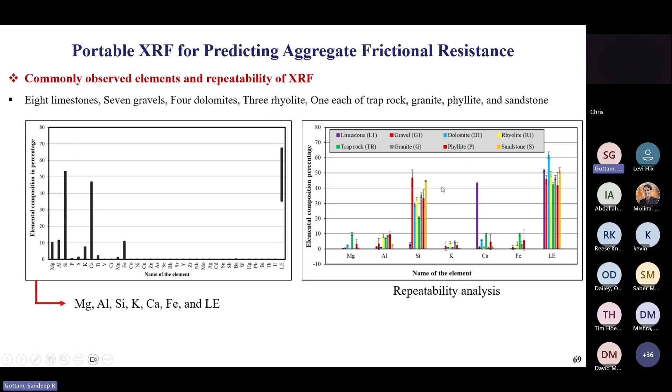Then we tried to verify the repeatability of the PXRF. We selected a few aggregates, one aggregate type from among all the aggregates. The repeatability study showed that the standard deviation is less than 10% for the selected aggregates.

Then we modeled this into ANN architecture. One we did was to predict the entire friction deterioration curve, and the other model that we did was just to predict the terminal friction value. Here I am showing the entire friction deterioration curve, as I previously showed for the terminal friction value, where the R square value was 0.94.

As you can see in this table, none of the R square values, whether for the training or testing data set, are less than 0.75. And this shows that the R square values are above 0.75 and the model is predicting the entire friction deterioration curve well. Just to illustrate the measured and predicted friction deterioration curves, I selected one of the commonly used aggregate types in the state of Texas.

The blue and purple ones are the measured friction deterioration curves, which take 43 hours as per the conventional test methods, which require ring preparation, polishing, and friction test. The red ones are predicted using the ANN model, and it takes just 0.5 hours. As we can see for all the aggregate types, the measured and predicted friction deterioration curves are close to each other. This shows that PXRF can be used as an alternative, as a surrogate to the conventional test process.

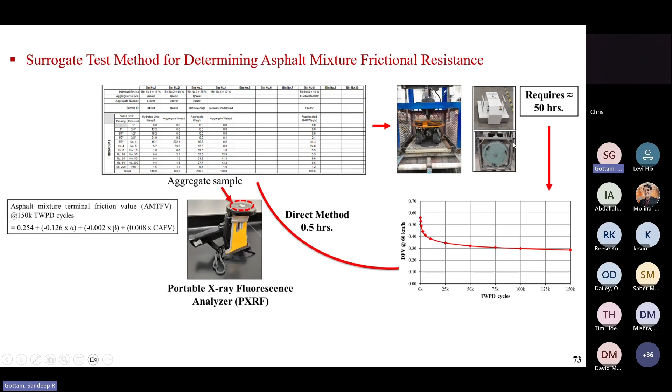So the main goal of this research is to incorporate frictional resistance into the current BMD process. Since so far we have focused on improving the structural performance, there is a lack of emphasis on incorporating frictional resistance during the mix design stage. So the first question was how to improve the mixture frictional performance. Our findings showed that if we target the intermediate portion of the aggregate, we can improve the mixture frictional performance by using a minimum amount of high friction resistance aggregate.

The same findings we verified through case studies and field friction studies, and the case studies confirm that aggregate type in the intermediate portion controls the mixture frictional performance. Our field studies also confirm that aggregate type controls the mixture frictional performance, and the effect of all remaining mixture parameters on the mixture frictional performance is negligible.

We tried to develop an accelerated test method and an MLR method as surrogates to the conventional test method, which takes almost 50 hours. Both methods showed good R square values. Those can be used to reduce the test time for determining the mixture frictional performance. We also proposed a combined framework which tries to consider friction, rutting, cracking, and moisture damage performance. Using that approach, a mixture can be made resistant for all the four performances.

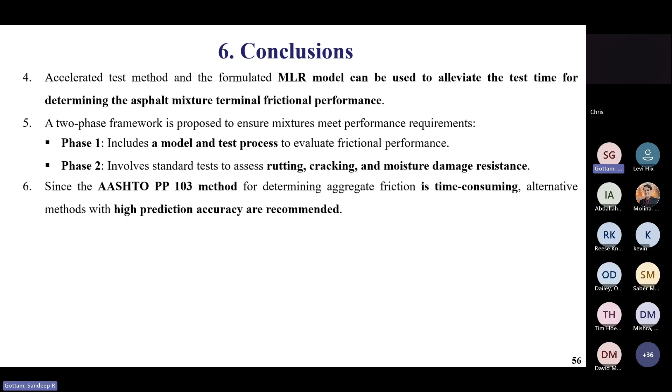So the near future work that we have been doing as part of this research study is that we are trying to construct some test sections for field verification of the intermediate portion's effect on skid resistance. And in the lab, we have been emphasizing the frictional resistance that is captured using the DFT device. And in the field, as we know, we use the skid trailer device. Even though there is literature showing good correlation, we are trying to do some field correlations on our own to see how the friction value captured using DFT and the skid numbers captured using the skid trailer test correlate.

And we are also in the process of validating the portable XRF ANN model for predicting aggregate frictional performance. As I mentioned, we use 26 aggregate sources. We are trying to increase the number and to go until 110 aggregate sources that we have in the state of Texas. And we are trying to develop standards for using three-wheel polishing device for the aggregate and asphalt mixtures frictional performance evaluations. This may help the DOTs for their routine test purposes. And we are also trying to finalize this method to incorporate frictional resistance into the BMD process.